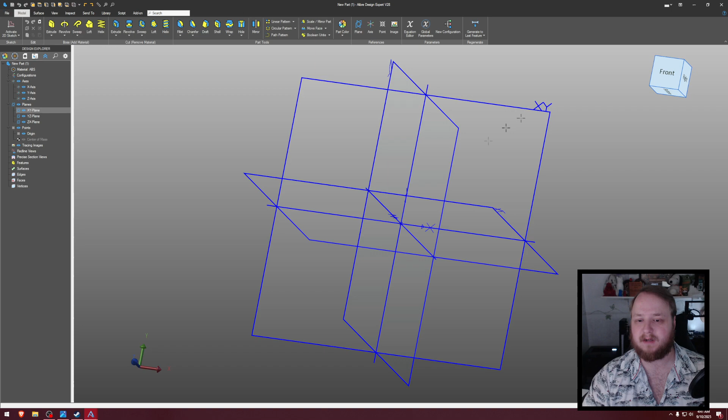Alright, so let's get into Alibre. I'm already here in a new part. Let's just go to the XY plane and make ourselves a quick cylinder. It doesn't really matter because it's just a demonstration. So let's extrude it 200 millimeters. That will do perfectly fine.

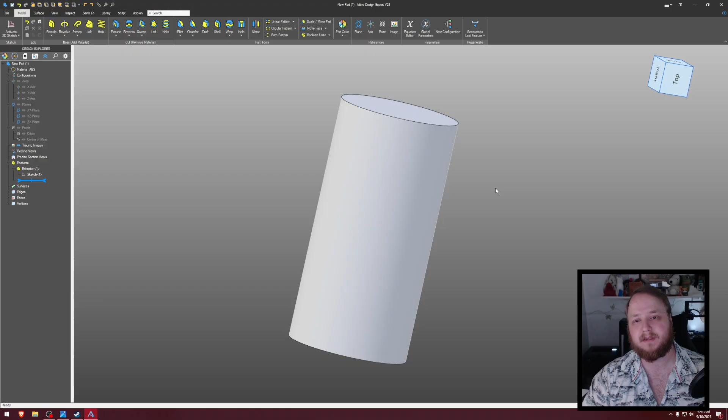So what we're going to do is show our planes, and make a new sketch on one of the planes that bisects our cylinder. And we're going to come down to the bottom of our cylinder, and actually use our cylinder itself as a reference figure just so that we can easily dimension off of it if we need to.

Might not be necessary depending on how you want to do this. Just a quick note, even though I'm showing this in Alibre, you can probably do most of this in any other CAD software. So what we're going to do is just make a really quick triangle.

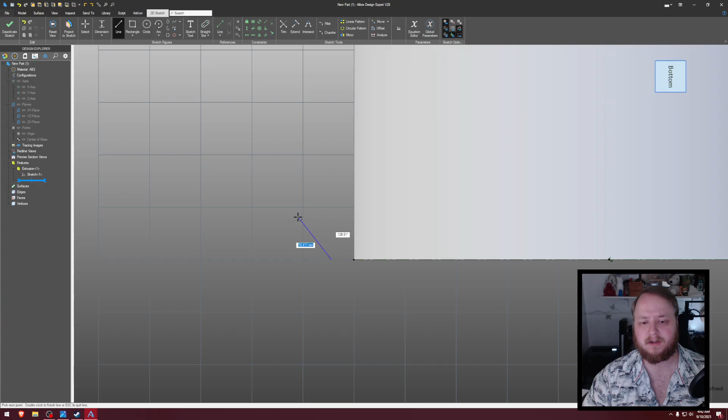Our triangle is actually going to be pretty interesting because it's not going to be an equilateral triangle. We're actually going to do quite an odd shaped triangle just because of how we want our knurling to look. And how do we want our knurling to look is the main question you have to ask yourself. So depending on how steep you want those hills and valleys to be is the kind of shape you want your triangle to be.

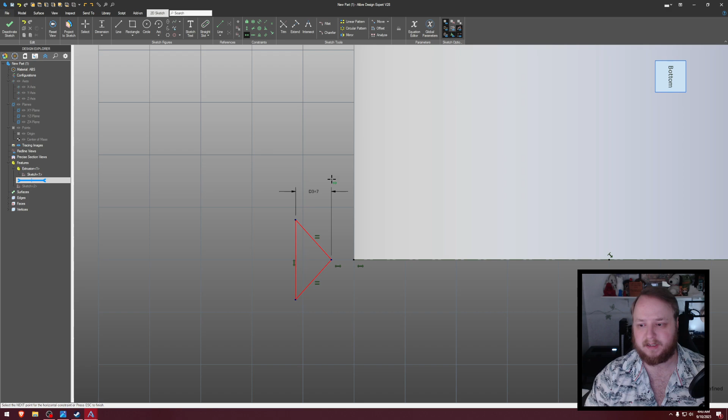So once you have a size for your triangle, go ahead and decide how deep into your object you want this knurling to be. If you want it really deep, you might have to do a triangle somewhere around here. If you want it just really light on the surface, like that maybe, you'll have to do something like that. So maybe 2 millimeters is about right.

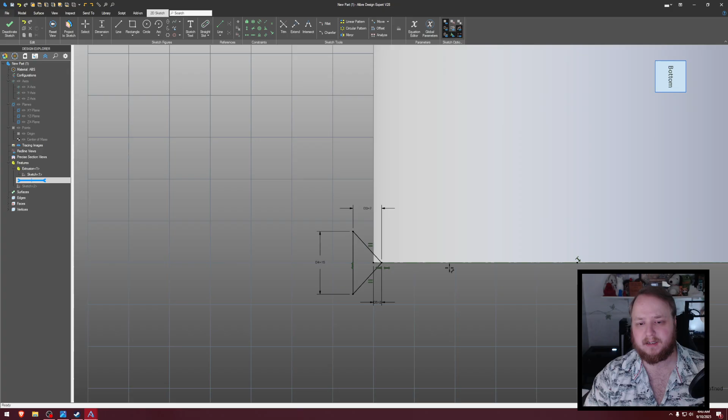So from here, alright, so we're going to activate a new sketch. We're going to do it on the same exact plane. We're just going to make a copy of the old sketch. So no matter your CAD software, go ahead and do that. If you can just duplicate the sketch, then do that.

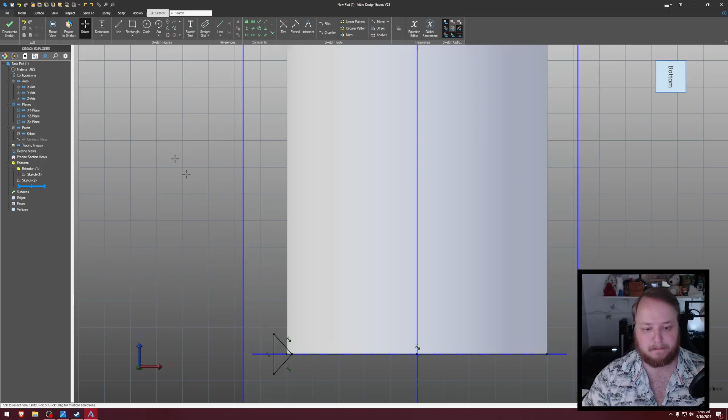Otherwise, maybe the project to sketch tool like I've got in Alibre, click on the old sketch, maintain figure type, and maintain association to source entity. From there, we have the exact same sketch. We're going to deactivate it.

On our first one, we're going to go ahead and do a helical cut, and we're going to do the axis, that one. And we're going to go ahead and make that height the same height as our cylinder, which was... that'll be D2.

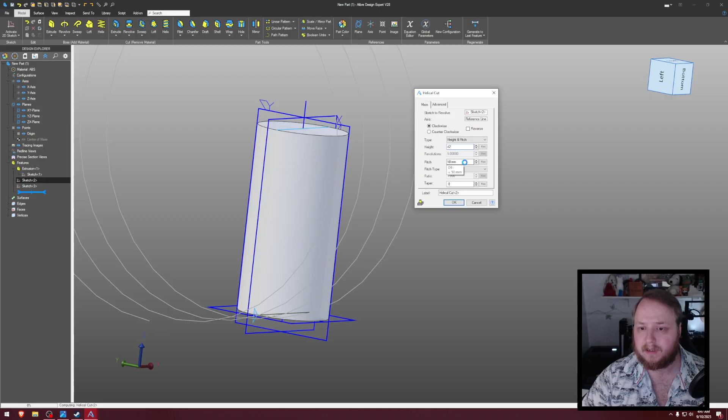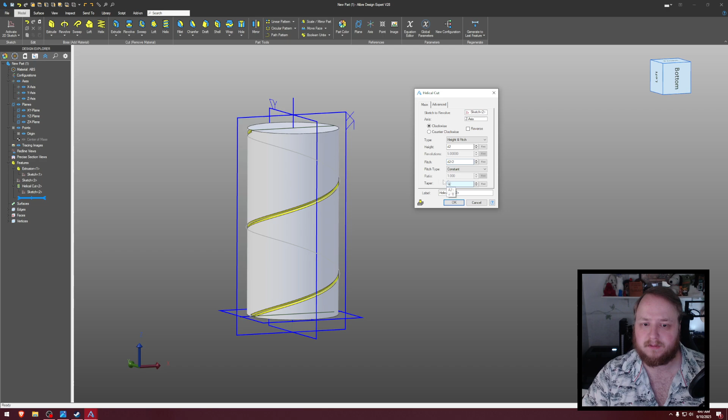And our pitch, we're also going to do D2. But you could also maybe do 2 times D2 if that makes it look a little bit better, or even D2 over 2, depending on how steep you want your knurling to look. I'm just going to do it at D2 for now.

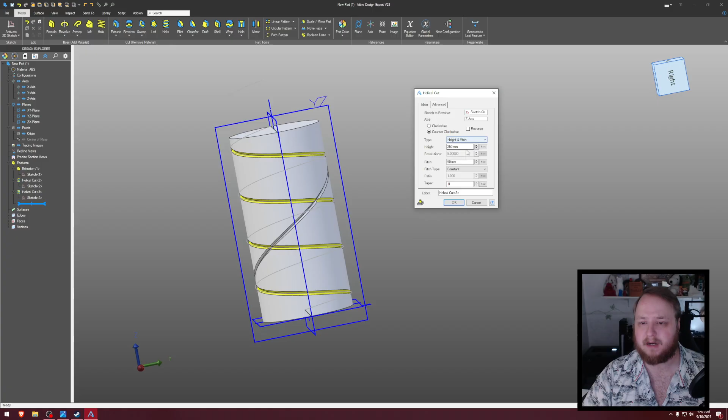Finally, I'm going to go back into the other one and do the same exact thing, but this time counterclockwise.

Now there's the start of our knurling, believe it or not. And we're actually almost done. From here, we're going to take this helical cut and do a circular pattern.

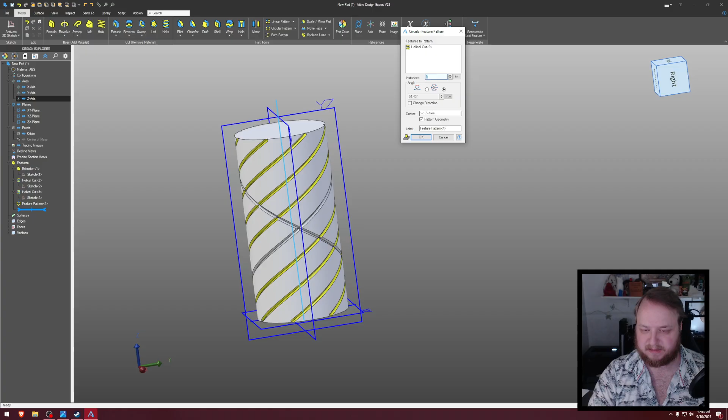We're going to tell it that the center is this axis, and we want to do quite a few instances, maybe 10. I have to give it a little while to load here. There we go. Go ahead and press OK.

And do the same thing with the next helical cut. We'll have to wait a second for it to load here as well. This is some pretty complex geometry. There we go.

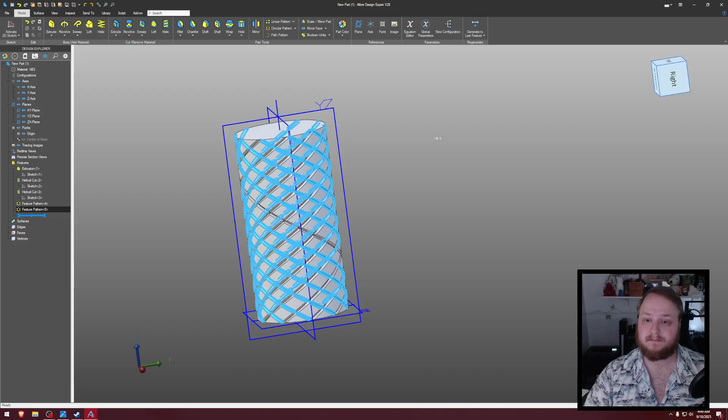Our knurling's looking pretty good, don't you think? If you want the knurling more intense, you can just increase the number of pattern instances here.

In fact, in Equations, I'm going to go ahead and make a new equation, and we're going to call it instances, and we're just going to label it 10. Actually, we're going to call it I, just to make it even smaller. We're going to make it a count and press apply. We should have, yep, we have I is 10.

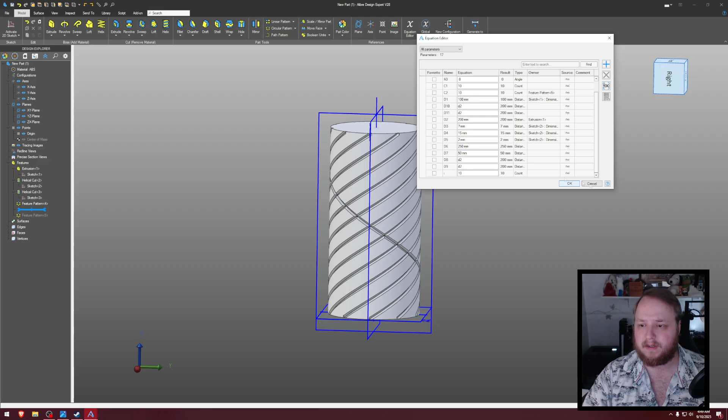So if we cancel and we make our feature pattern I, press OK, it should still be 10. Finally, let's go over to the other feature pattern and do the same thing, changing our instances to I.

Now, please remember, as I was saying before, these cuts can be quite intensive on your PC. So if you're having trouble with that, maybe save the knurling until the very end, or suppress the feature until the very end, or suppress most of the instances, or maybe just give it one instance until the end, just to save your PC and save yourself some loading time.

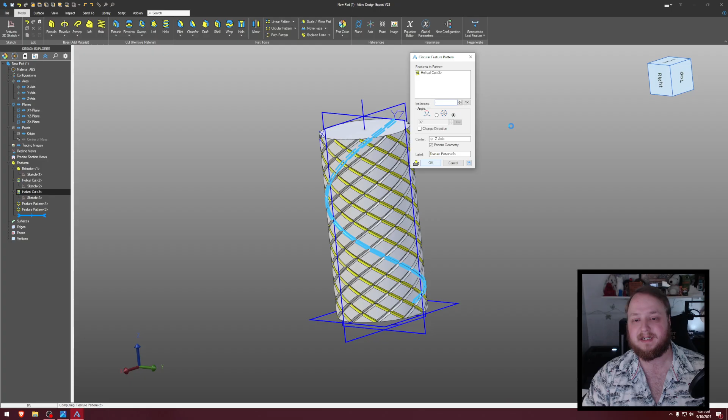However, from here, you can see that it looks pretty good, and if I want it even stronger, I can go down to the instances and change it to maybe 12. And it's going to load one more time.

And it's a little stronger now. So if you don't like the look at the top here, and you'd like it to ease into it a little bit more, you can bring us back to the start here before the helical cuts, and you can add some chamfers to the top and the bottom here. Maybe like a 4mm chamfer, and then refresh the part.

Seriously guys, this can be some really intense geometry, so save it for the very, very end, because, oh, there we go. I was loading for quite a while there, and it finally just now finished.

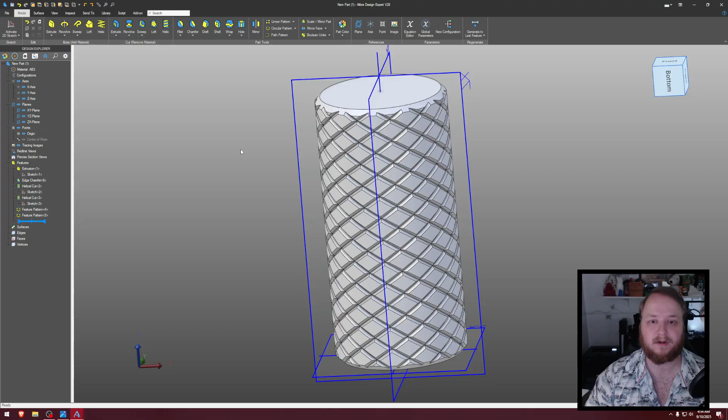In fact, make sure your GPU is actually being used by your CAD software. If you need to, you can get rid of shading and things like that, it might help. I just turned off ambient occlusion, just to give me a little bit better loading times on this.

Hopefully it'll help. Anyway guys, that's how you do some simple knurling. Make sure you play around with that to get the effect that you want. There's basically infinite possibilities with this, so hopefully it helped you out.